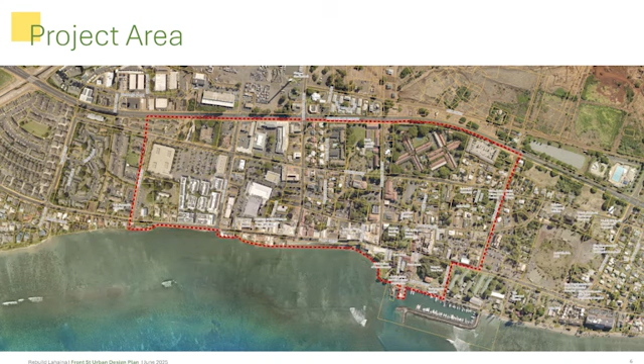This effort we're doing now is in coordination with many of the other rebuild and restoration efforts happening at the same time. There's a concurrent process looking at the Royal Complex. It's actually very exciting, and this process kicked off this week. Next Wednesday, the Department of ʻŌiwi Cultural Resources will have an opportunity to introduce this project. This is an exciting opportunity to restore many of the cultural components of the Royal Complex. You can see the two project areas overlap and intersect at the wharf, so we're going to be coordinating with the group looking at the Royal Complex over the coming months.

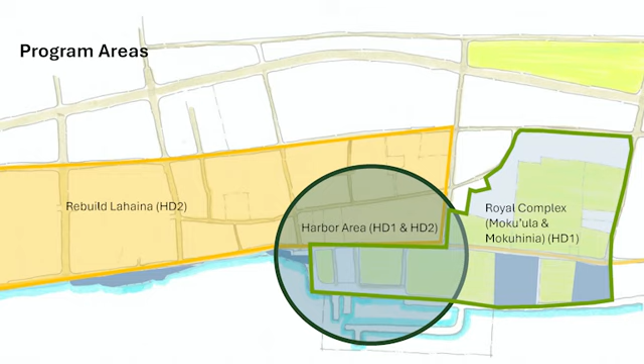We're at the beginning of our process. We actually started with an initial trip last month, and we're here at the June Community Workshop. We're going to go through a process of testing, getting feedback from you all, and refining our concepts between now and an additional workshop that will come back in September. The goal is to get a phase 1 plan together very quickly by the end of the year. We're trying to go quickly because we know a lot of people in the commercial core want to rebuild, and one important thing they'll need is design guidance from the county on what they should be expected to do. That's an important part of our work here today.

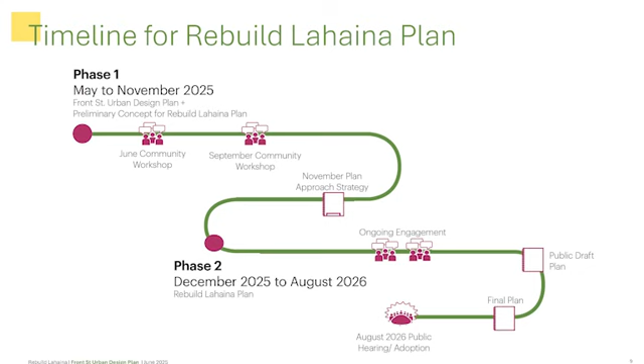There's a phase 2 piece that will happen mostly next year. It's going to look at a larger portion of the Rebuild Lahaina Plan area, the area that was impacted by the fire. So we're doing an initial focus on the commercial core, and we will spread our boundaries out and look at those for phase 2 starting in December.

We're here just to start testing ideas and design options as we learn, but the goal is by the end of the summer, when we come back in the fall, we'll start to work towards preferred design alternatives that can become components of the plan. The idea is this is a more concentrated, focused effort looking at a smaller area of the West Maui Community Plan, giving us an opportunity to dive deeper.

One of the things we can do here is provide some design guidance, because the documents we have don't give a lot of good content that provides guidance for setting expectations for what can happen. We understand we're in a context where folks can rebuild - they have the opportunity to build back what was there before. But we also know folks can make choices about making changes, and that there were portions of Lahaina that maybe weren't working as well as they could. We've had an opportunity to hear what some of those things are from all of you this week.

So the planning process: we start with ideas and visioning, put those out to you, get feedback from what we heard, and try to make refinements. We're here at the beginning. The idea is we'll work towards some things where we actually find agreement, and where we find agreement and consensus, we'll put those things together into a plan.

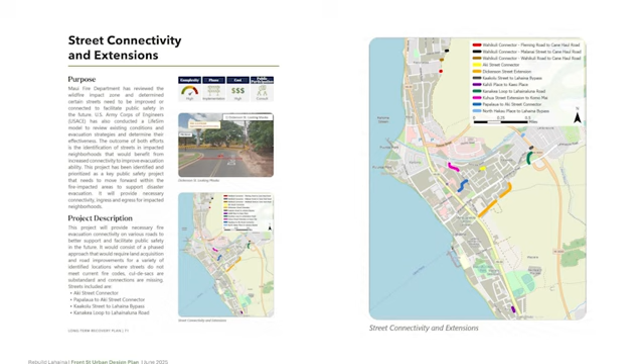We also are concerned about connectivity. This is a page from some of the plans that were produced in response to the disaster in Lahaina. The idea of connectivity, not just to make a walkable place, but to make a safer place—the folks up at Kahua Camp who were stranded, and the other challenges people had getting out, were due principally to the lack of connectivity in the street network. That deals with fire, but it also deals with issues like tsunami evacuation and any other time you want to get out of the neighborhood quickly. So this idea of reconnecting the snipped streets, and having as porous and flexible a network as possible, isn't just best for walkability, it's best for safety.

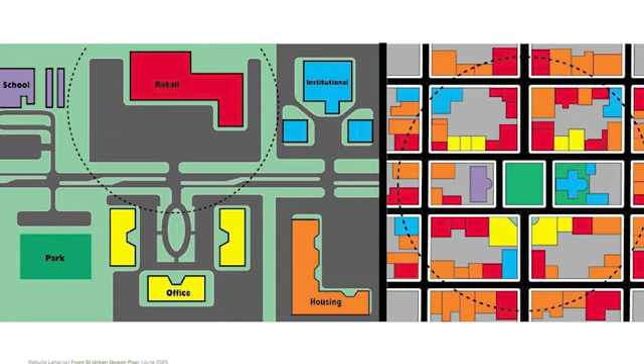I would add, there's actually—if you can see my laser—21 ways to get from this lower corner to this upper corner. So the network really provides that sort of flexibility that's safer as well.

The other issue that came up in terms of connectivity—certainly pedestrian connectivity—was the idea of pedestrianizing Front Street. We're going to be talking about a whole range of options for what that might mean.

As an advocate for walkable cities and walkable towns, I'm a huge fan of pedestrian streets. It's a bit of a challenge because about 210 retail streets in the US were pedestrianized in the 60s through the 80s, and about 190 of them failed—the merchants went out of business. So we're very wary of what it means to pedestrianize the street. The main lesson isn't to not do it, but to do it in a way that's flexible—to do it in a way that if you're not successful, you can open it up again.

To do it in a way with bollards that allow you to have it open certain times and closed other times. One thing we don't know yet - we're going to present a first concept tonight for how much of Front Street might be a more strictly pedestrian zone, but that's something we want to hear back from you about. We've certainly been hearing a lot from different folks who visit about their goals.

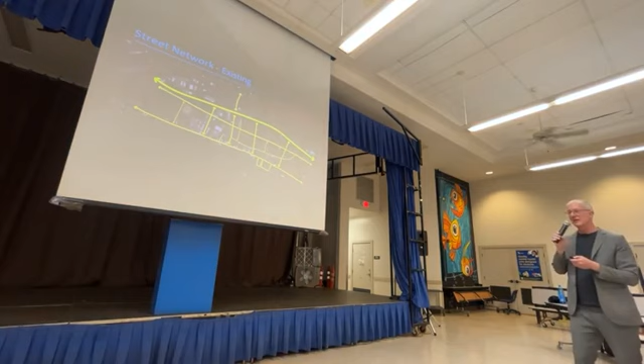I'm going to hand it now over to my colleague Ben Parker, who's going to talk to you a little bit about the street network.

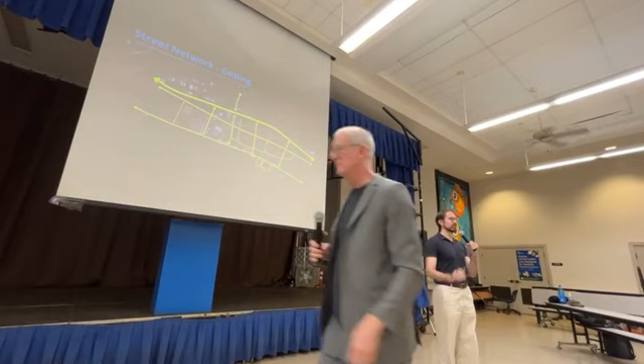Thank you, Jeff. And thank you all for coming out tonight and sharing your time and your thoughts and your place with us.

So this is a diagram of the existing street network in the Lahaina commercial core, with the Honoapi'ilani Highway in the back with 2 lanes going each way, Wainee Street running the length of the site, Luakini Street running for part of the way through the site and then currently stopping, and then Front Street running along the waterfront.

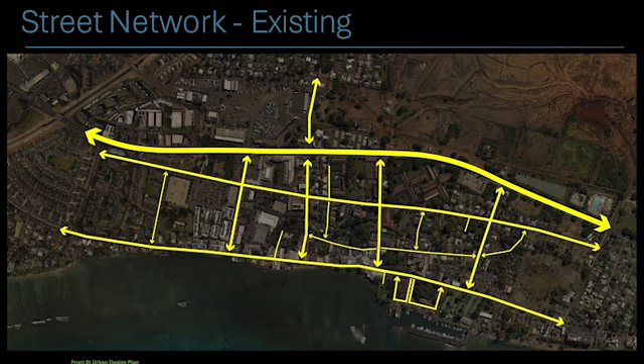Four main Mauka-Makai connections currently, with a few other partial connections. And as Jeff was saying, a street network with small blocks is really important for walkability. It also helps with traffic and also helps with safety.

One of the things we've been exploring this week is extending Luakini Street all the way through to Baker. We think this would extend the character and activity of the core of Lahaina town, as well as help with the overall street network issues.

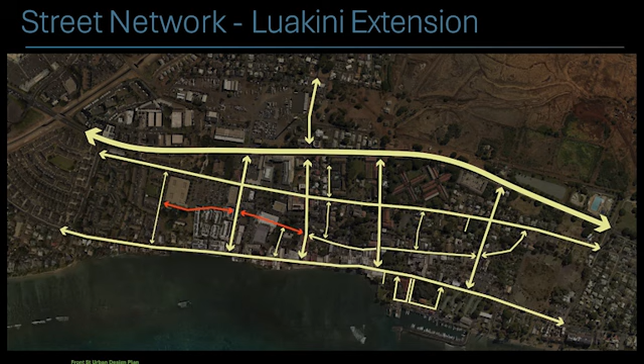We've been in conversations with community members who are stakeholders in these parcels and around, and they're open to and excited about this idea. Another important idea we are experimenting with is connecting as often as we can back to Honoapi'ilani Highway.

We understand that because of the Lahaina bypass, this road eventually - not now and maybe not even soon - but eventually may be returned to a county road instead of being a state road.

And this gives us a lot of opportunity in what we do with the road, especially if you're crossing from Mauka side down to Lahaina, and you're a pedestrian - maybe you park your car here or you walk down - or if you're a cyclist or anyone who's not in a car, crossing Honoapi'ilani Highway is very uncomfortable currently.

And if we could make that pedestrian crossing more safe, more comfortable, it would do a lot to connect the commercial core to the rest of Lahaina.

There are other opportunities where we think it makes sense to put cut-throughs. Obviously that's a complicated thing that involves a lot of conversation, a lot of process, and a lot of learning. And not every one that we show would necessarily make it.

But from the perspective that we know small blocks make great walkable places, we think it's worth exploring where you could possibly connect some of the street network, because some of these blocks are very long, and while there's good connectivity along the water, there's not as good connectivity back Mauka side.

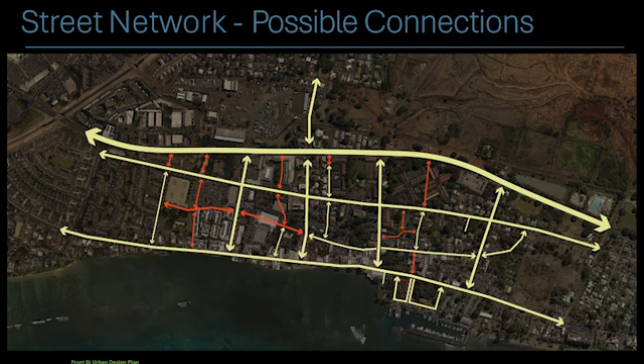There's also existing pedestrian connections that existed. So on Front Street, if you parked in the back off of Luakini, there were these small pathways that you could walk and get out onto Front Street quickly. We think those are very important.

And we think exploring opportunities where new pedestrian connections could be added is also extremely important and worthwhile when we have the opportunity to do so. So that's how we took what we've heard about the street network and what we've learned over the years and applied it to our initial studies.

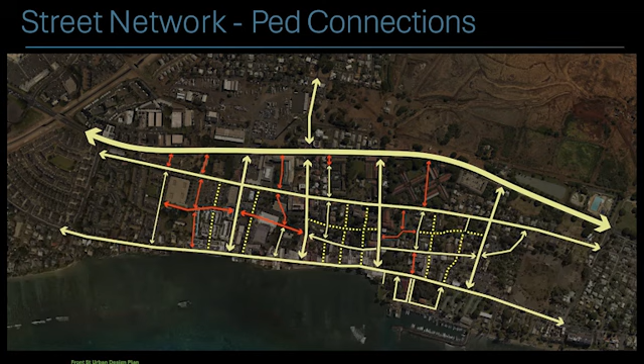Jeff is going to talk about one version, one possible version of what things could look like. I completed this little series of drawings right before we came over here tonight, but I wanted to show you in a different way how this network could be stitched back together.

So what you see here is the existing network, and Ben mentioned most of the streets, but just to orient yourself - the Foodland block is this very large block here, which we're proposing that Luakini cut through, as with the next block, which is the outlets of Maui.

Again, both of these - the owners of these sites are prepared to develop them fairly quickly, we believe. So you can see the opportunity to bring Luakini through, as Ben mentioned. But there's lots of other opportunities.

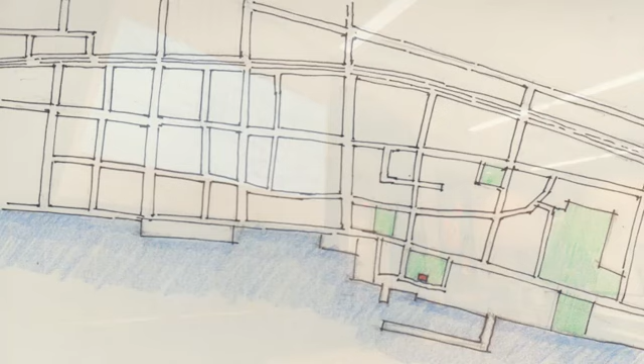And so the difference between these two slides - you can see that, for example, the Foodland block and the outlets block, essentially this quarter of this block is still a pretty big block when it comes to the sizes of blocks that you find in towns.

It makes sense to break it up in the way that you see. You see those blocks to the north, to the left, being broken up. You see additional Mauka-Makai connections coming through those blocks, extending all the way to the Honoapi'ilani Highway. You also see additional streets that dead end, that almost reach the highway but don't get there yet.

You see this street here being extended through. As Ben said, these connections to the highway will be a long time coming, but we think it's important to put them in the plan so that as the plan evolves, and when the highway becomes available as a county road, the network can be completed. Essentially, that's the first thing you see happening.

The second thing you see happening is the idea that up at the mill site, across the highway, is at least tentatively planned as an ideal location for a transit center, for a multimodal hub. It's also a great place to get the tourists to park so they don't bother you with their cars in the heart of the city.

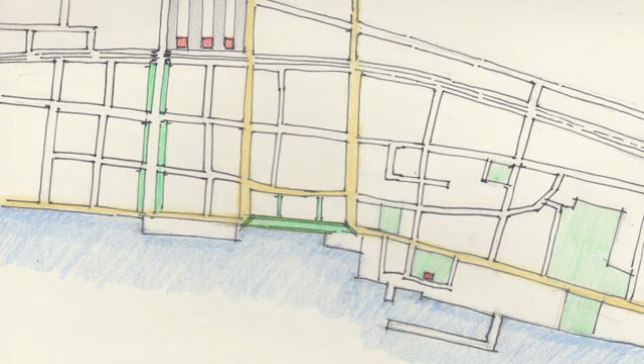So that's that. Next, what we're showing is the idea of pedestrianizing at least part of Front Street. What you have here is Lahaina Luna, next to this proposed transit center. Lahaina Luna is a very important access point into the neighborhood. Next over is Dickinson, another good access into the neighborhood.

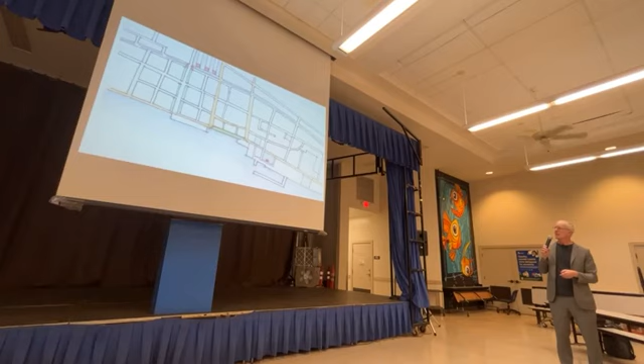Now, if you look down at the shoreline, you see that there's extended shore here where shops once were. There's also extended shore here as you get towards the wharf. But the place where Front Street is skinniest and tightest, with the least opportunity for using it well, is between those 2 streets.

So it really makes sense, as you see in yellow, to have kind of a loop where you come to the water and go. This is all two-way streets, but basically a loop to the water north on Lahaina Luna, and a loop to the water south on Dickinson. And then the idea is that in between—and our landscape architects are going to show you more detail of this—the street in between could be a pedestrian street.

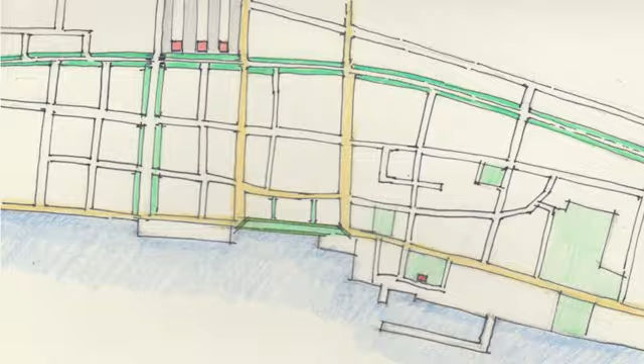Finally, in this drawing, you see the green surrounding the highway. This is, again, part of the dream about what this could be. But rather than having Lahaina split in half by a highway that has now effectively been replaced by a bypass, does it really need to be 5 lanes anymore? The car counts on it would suggest it does not need to be 5 lanes.

And in fact, it currently is not 5 lanes, because if you've driven on it today, it's actually just 1 lane in this direction, and it's functioning. So the idea there is that it could become a really special street. You have a lot of trees here that grow very quickly.

And I understand in this part of the island they might require a little more water and a little more attention. But from someone who's not from here, the street trees that you have are just mind-blowing. The idea that street trees can be placed between, not forcing you into the road, but between the sidewalk and the highway, creating a protection from the road, is something that excites us very much.

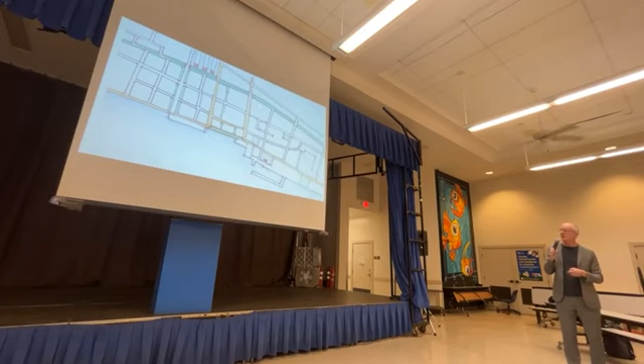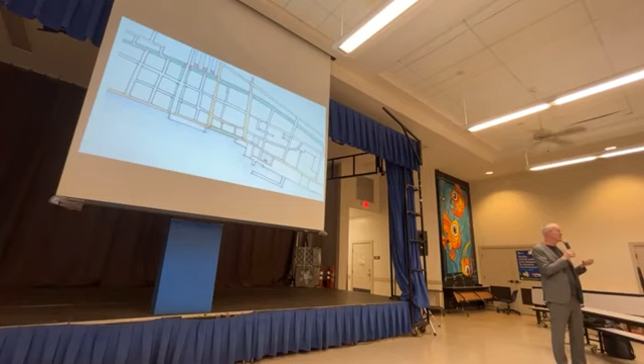So that's kind of the last move that we're recommending, and this then is our preliminary proposal. What I haven't talked about is changing the individual streets within the plan, and we don't want to see the character of Lahaina change. We don't want to see those streets become widened, or start to look like all the other streets in the rest of the island or the rest of America. However, every street that we visited presented some opportunity to make it a little more pedestrian friendly, a little more green, a little more walkable.

So very quickly, Julia Lockman from my team is going to walk us through some of the proposals that we're making for these streets and the strategies that we're using to make them more walkable. Thank you, John. Hi, everyone. I'm Julia.

Really honored to be here. And these are some representative street sections of the strategies that we're trying to work with so that we can make Lahaina town more walkable and more enjoyable to be as a pedestrian, biker, or a driver.

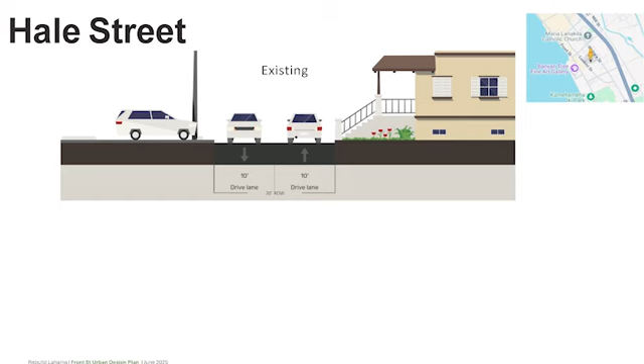So here's Hale Street. The existing right-of-way is 20 feet. And we put out here narrowing the driving lanes and adding an advisory lane so that cars can pass one another and dip into that advisory lane that is a shared space for pedestrians and bikers that is clearly delineated as a space that people can use in a shared way.

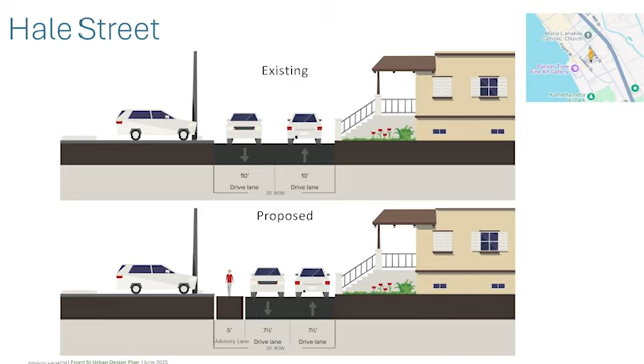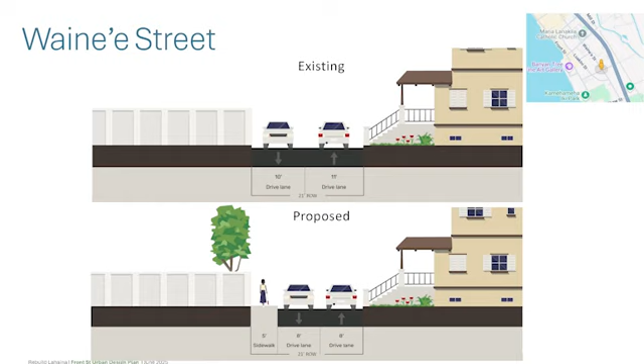Another strategy we use is taking driving lanes that are a little bit too wide and adding in a sidewalk so that people can walk alongside, narrowing the driving lanes within the existing right-of-way that already is there. Then also encouraging residents and businesses to add to the street canopy where there isn't space for street trees on the right-of-way owned by the county to make the walk more comfortable and interesting for pedestrians.

Then we have Papalaua Street, which represents a lot of the strategies that we're trying to work. As Jeff said, this is one of the widest streets in the center of Lahaina town. And so we wanted to narrow down these lanes, take out the turn lane because it's not necessary for the amount of traffic that is currently and projected to be on that road.

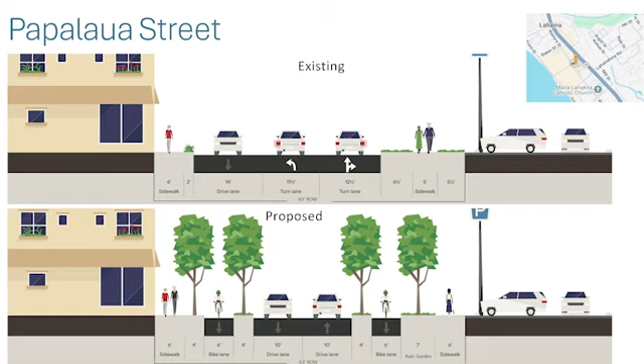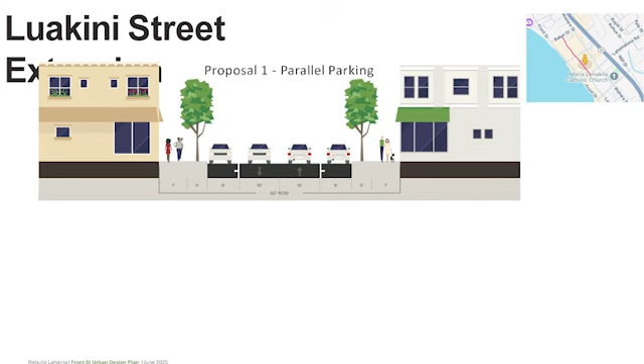And then the Luakini Street extension, we picked out two possible ways to orient this as we were talking with the businesses. On both sides, we want to have businesses facing the street so that people feel interested and safe on these streets. We have parallel parking as one option, and then we have angled parking as another option, which would have more street trees in between the different cars for parking options.

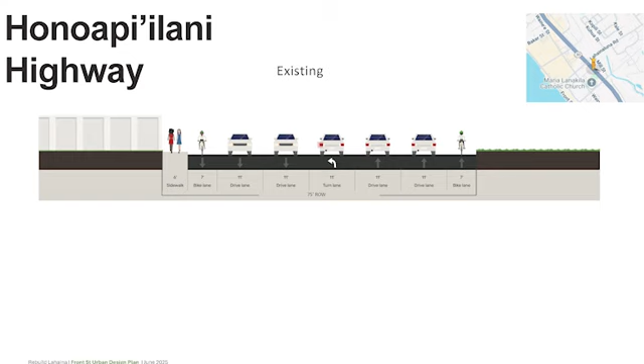And then options for the highway, for in the deep future, to make it more interesting and walkable and crossable for people to come into Lahaina town is to narrow it down from 5 lanes to 3 with a turn lane, adding in a parking lane, bringing pedestrians onto both sides, and then adding substantial street trees so that it's a more comfortable place to walk.

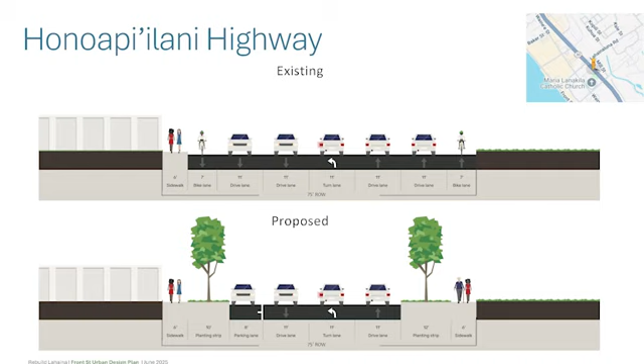So those are some of the preliminary strategies that we're proposing today, and we'd love to hear it. Thank you, Julia.

That sums up our preliminary, and I stress preliminary, thinking about both how the network would function and how the streets and roads within that network would function. A huge part of that is landscape, trees, and greenery. And I think it's time we bring up our landscape team. This is Marcel from Bionic, who will tell you more about that.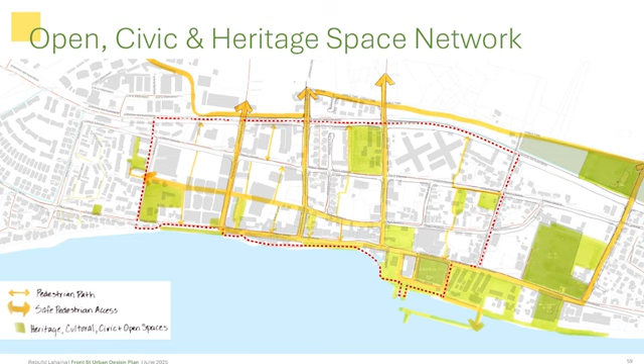In the network of all of the streets, there's a whole series of connected places. These are your cultural sites, your public open spaces, and your streets. And when you combine them all together, you get an open space network. One of the comments we'll see back here is more public open space, more places to gather, and amenities. Well, it's crowded. Lahaina Town is crowded, and there's not a lot of available space.

One of the concepts that you can sort of squint your eyes and start to see is that we're making use of the small, the medium, and the large to make sure public open space is distributed all the way across Lahaina Town, not just in one place or another.

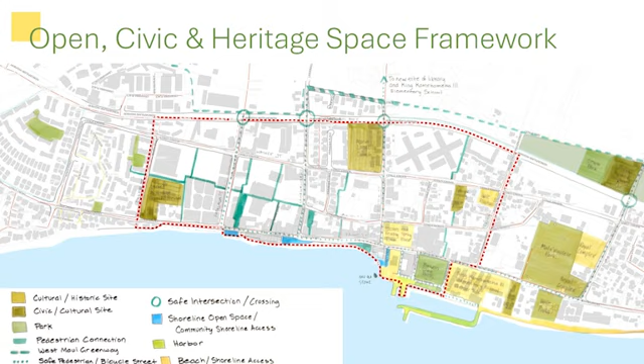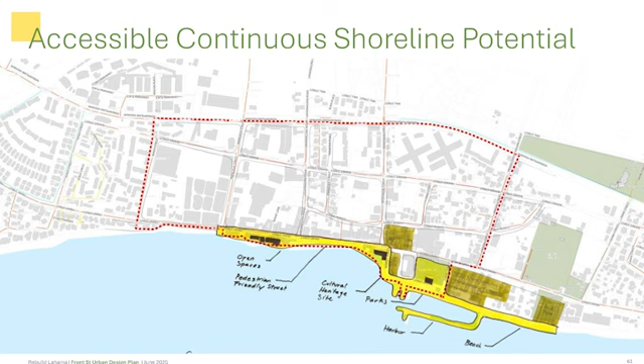If you do that and you're strategic about it, there's the possibility of connecting these sites up, so the sum of the parts is in the whole is greater than the sum of the parts. One of the things we have heard calls for on many of the Post-its is connectedness. If you connect the cultural sites and use streets and plazas and public spaces, you can get a continuous kind of space at the water's edge, which is something that's very human, and we're all drawn to finding and reaching the water's edge.

Another comment that you'll see a lot of is about Front Street. Closing Front Street, pedestrianizing Front Street, no cars on Front Street. And so we've really tried to put some shape around what that could possibly mean. Here's one set of opinions, which is that Front Street should have cars all up and down. And that's the way it was pre-fire.

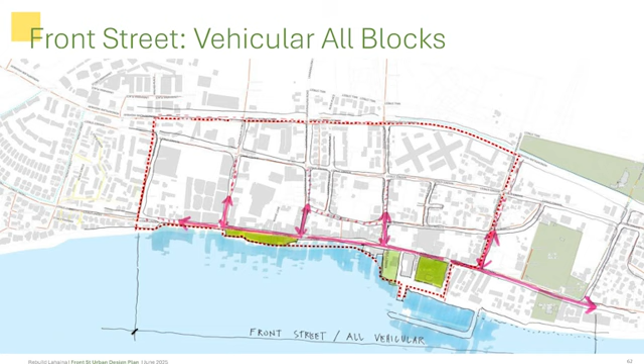And so these red arrows indicate where cars could go. There's a different version which says that we're very confident about this piece in the middle, from Lahainaluna to Dickinson, that might be a great place to have pedestrianized. And then cars could circulate around that on both sides. So that's another way to think about it.

And then there's another thought about pedestrianizing Front Street that says maybe from Lahainaluna North, that part's vehicular. Lahainaluna South, maybe up to the Royal Complex, that part's pedestrian. And then maybe when it gets into the Royal Complex, it goes away entirely. And that space really becomes something different. It represents a shift in the way you think about it, the way you interact with it, commands a different kind of respect.

There's a whole team that's going to be studying that. But that's a different version of what a pedestrianized front street would mean.

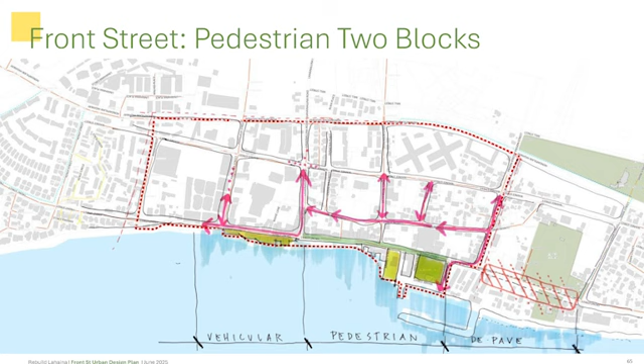I think floating above this at 30,000 feet is a little bit abstract. It's kind of hard to put your head into it. So we zoomed in to the one part that we're really confident in, that pedestrian, a greater kind of pedestrian priority is probably a good idea.

So when we talk about pedestrianizing Front Street, we're talking about maybe it could be something like this. It feels more like a park or a plaza where pedestrians have the priority, where the materials are nicer and richer, where there aren't curbs, and you can walk freely Mauka to Makai without barriers. So imagine a pedestrianized Front Street that you might be talking about something like this.

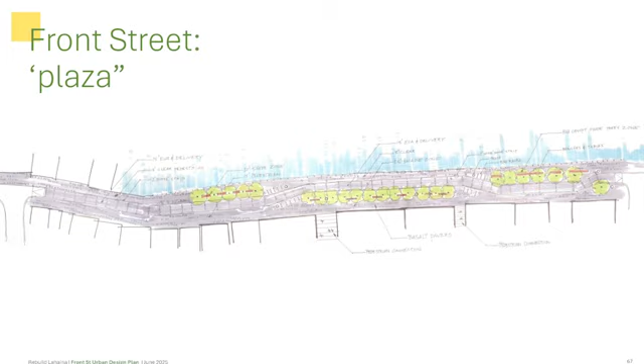And so this is very washed out, I'm realizing. But here's two different ways you can think about it. So this is Front Street as a plaza. And what it contemplates, I'm just going to point some dimensions out. Here we're at Dickinson, Lahainaluna here. This section to about the curve in the road is 40 feet. And then when you make that curve and you go from the building face to the seawall, then you go out to 50 feet.

So you have more room. What can you do with that extra space? This drawing shows one lane going down the middle, one way going south. It shifts to one side, then the other, which slows cars down.

When you do that, you create bigger spaces for trees, shade, and public gathering, and give businesses room to breathe, maybe dining out on the sidewalk. There are a lot of possibilities when you use that street not as a street, but as public open space. This is Front Street as a plaza.

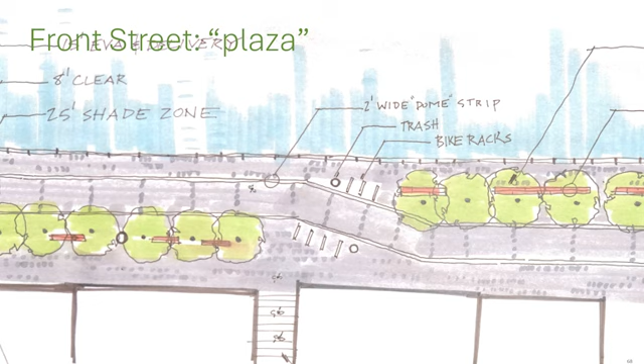Here we're zoomed in. You can see places for bike racks, places for benches, a wide 8-foot area to pass at all times, and this shape of the road keeps things nice and slow. Pave it with a beautiful local stone, black basalt, and that would really change the mood of Front Street. That's one way to think about it.

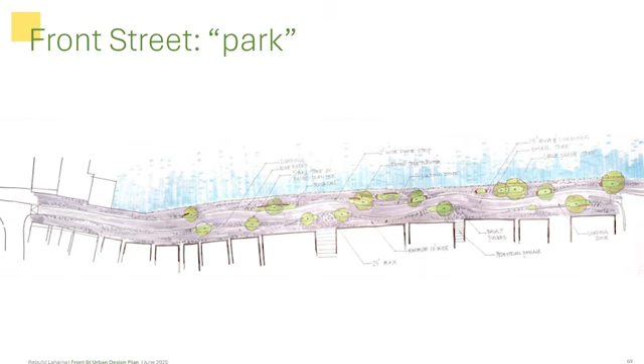Another way to think about it is Front Street more as a park, more free-flowing, not so linear like a street, but wandering and casual. It changes the shape of the street to a flowing curve, with wide spots and narrow spots, and room for planting and trees.

Here we're zoomed in. Imagine a Front Street that never gets narrower than 10 feet, almost double what's out there pre-fire, or places where it swells to 25 feet wide, with trees and the right bench in the right place looking out to the view, nice and slow. These are a range of ideas about what's possible when you think about Front Street as public open space, not just as a road.

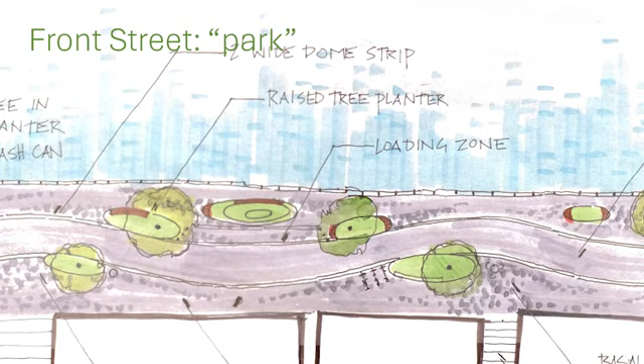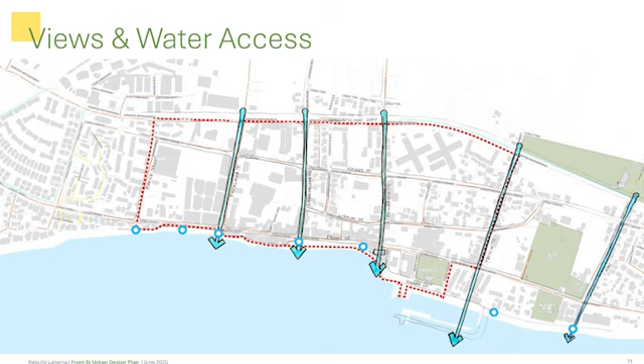Another set of comments was about views, how important they are, and access to the water. So this is a simple idea: don't build things in front of the street ends, and at every street end have a way to access the water. You can talk about that as creating equitable access to the water all the way across Lahaina town. You don't have to go all the way across town to get into the water if you're over here.

But how would you do that? Here's an idea where access to the water at the end of the street is just a little stairway that allows you to get down there. That's not something all abilities could do, but a lot more people could get to the water that way.

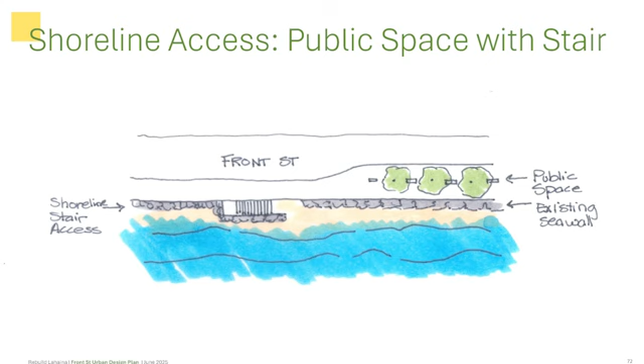Here's a version that says if we want to get everybody to the water, maybe we have a little stairway and a ramp. But it takes more space, and you have to interact with the water's edge, which is more complicated to do.

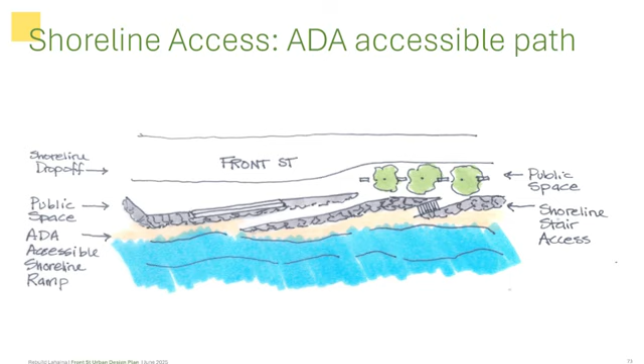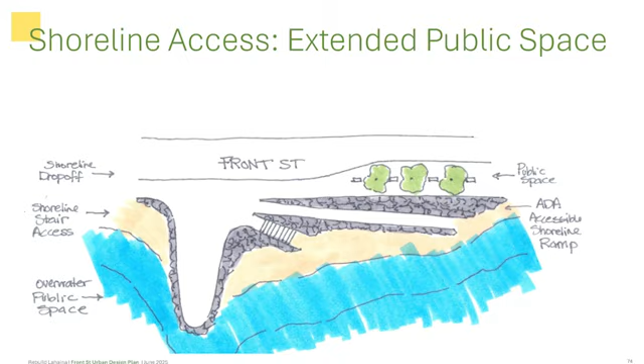Or finally, maybe there are places where you push out a little more, with a stairway and a ramp down. For people who can't do that but still want that water experience, maybe there's a place where you can go out, leave the town behind, and maybe cast a fishing pole from that spot. Different ways of creating water access could mean something quite complicated or something very simple.

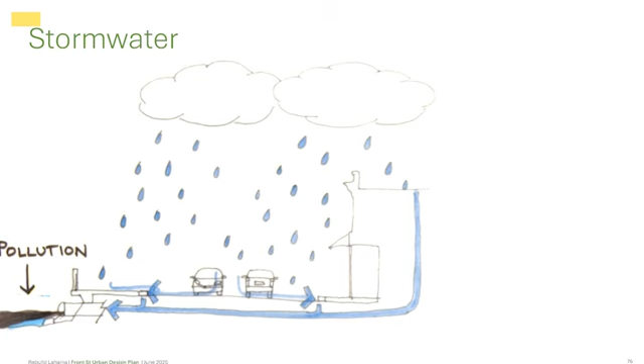Another set of comments is about the water itself and the ecology of the reef today, and how rebuilding can make that better. Today, water that hits the streets and buildings goes into pipes, picks up pollutants, sand, maybe oil, and goes right into the reef, which is bad for it. Building back better would mean intercepting that water, treating it, not letting it all go in as fast as possible, and delivering better quality water to the reef. That's a good start, beginning with treating stormwater in the streets, where the water lands.

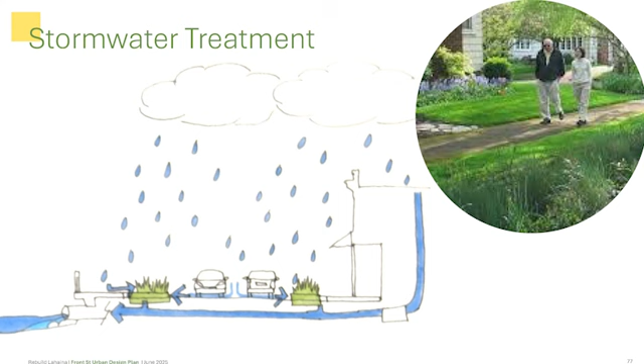Other things that could contribute to the health of the reef: stormwater management inland, making the seawall ecologically productive, creating niches for microscopic organisms, smaller organisms, shellfish, juvenile fish - that's the nursery to the larger reef. And then possibly even re-nourishing and reseeding the reef. It's a different kind of ethic about how building back could think about the reef and the water, and you can imagine this scales up to the entire district.

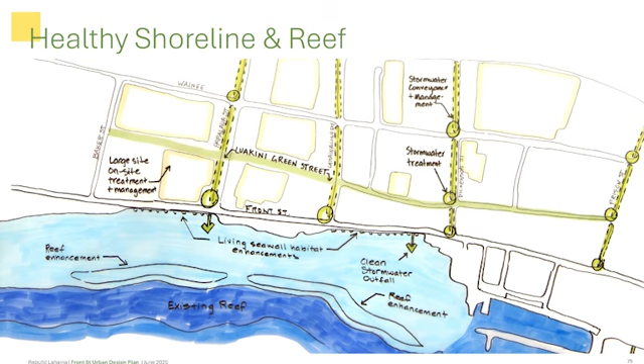You scale the entire district and you have to think about it this way - what can you do when water lands here, on its way to the reef, the kind of water you release, the habitats we can create here, and being good stewards of the reef in the future. So that's a summary of things we heard and ideas we put on paper.

Sometimes there's a lot of agreement, sometimes there's a lot of different opinions. The point of this process is to keep creating those options and bringing them back to you and getting your feedback. With that, the next part is about rebuilding, and I'm going to pass this back to Stefan.

Hello again. How's everybody doing? Good? Okay.

We've been here for a while. I'm going to try to close this out so that we have some more time to talk story after this. And I believe we also have an opportunity to hear from our mayor.

So I talked about this idea of design guidelines, providing some guidance so that property owners have an understanding of what the expectations are for when they rebuild. I'm just going to focus on 3 things that resonate with some of the themes you heard tonight. The first one is making streets and blocks, particularly where blocks might be really big.

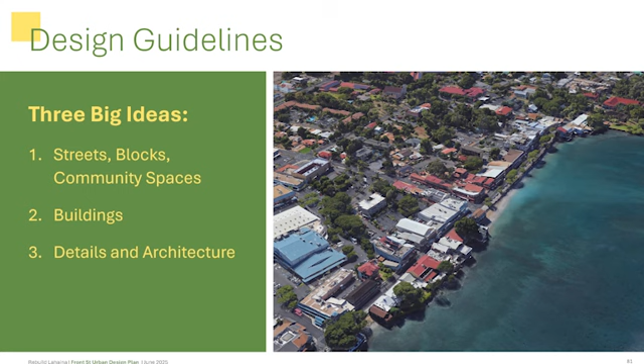The second one is thinking a little bit about buildings and what makes buildings in Lahaina Town special. And then the last one is about the details, the different things of architecture that made Lahaina Town so special. These are all things we have an opportunity to think about and present in a straightforward and objective way so that folks rebuilding have some clarity about what the expectations are.

Jeff talked about this idea of making blocks out of the Foodland and Outlets of Maui blocks. And this is just to show some ideas for what can emerge from that.

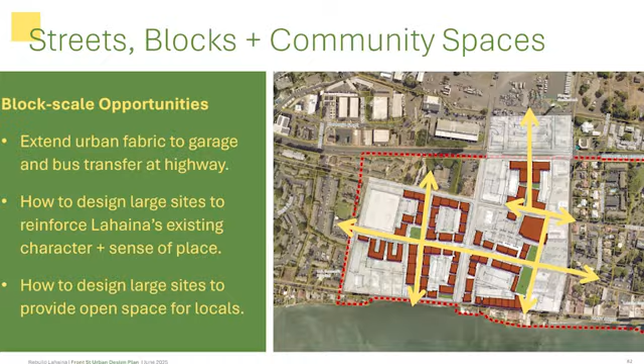So we want to understand if we have opportunities to reinforce that. This shows how buildings and open spaces - and we can think a little bit more carefully about how we arrange parking lots in that context.

I do want to mention that one of the things we heard was that there was a need for community space in Lahaina Town - that if you wanted to have a family get-together, rent a banquet hall, have a party, there was really no space available in the core of the community anywhere. The cinema space at Foodland had provided that opportunity, and what we understand is that part of the building in particular cannot be rebuilt.

So we thought, what if there was a community space in this part of town that was both proximate to Front Street, but could also bring back some of those family-oriented activities. One of the special pieces of this is that the Luakini extension here, we thought, would be a really great opportunity for a community open space on the inside of the block, adjacent to where Foodland is today, that could be organized with maybe a banquet hall or a community space, both indoor and outdoor, used for those kinds of opportunities. And then you could get right out to Front Street. This is, I think, the sort of Wahie Lane here that some of you might remember.

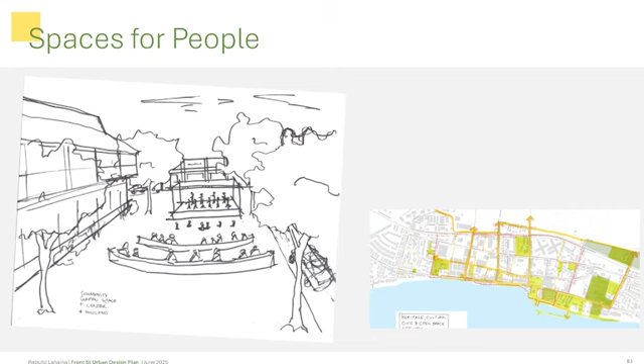So that's one thing we can think about. We can provide guidance to property owners about what we want to see on some of these parcels.

I'm going to talk a little about building form. Really special and unique, different from a lot of spaces that we know. Parcels were really tiny, buildings were actually really small. You could walk through town and pass an awful lot in a short period of time, and things were built close together. So we want to understand what guidance we can provide so that Lahaina town looks and feels a similar way, even though we know we're not going to build it back the same. The walls are going to be different. We need to use things that are fire resistant, but we still have an opportunity to build compactly.

This is a place where there isn't a lot of guidance in the planning documents that the county has, because there was never an expectation that there was going to be a lot of new building happening. It was all about making adjustments to the historic fabric that was still there. So we have an opportunity to think about how we can be really objective and provide guidance for what we expect property owners to do.

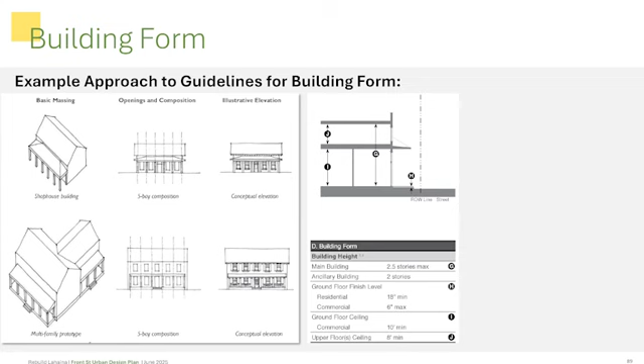Two things in mind here: the massing of buildings, but also how buildings orient to the street. We use the word frontage to describe what the face of the building is like and how it might relate to the sidewalk or the front yard in front of it, and we can provide some clear guidance for that.

So we have an opportunity to say, well, what should the architecture be like in the future? What are the details? If there's an overhang, how should we do it? We can provide clear guidance so that property owners who might be rebuilding have a sense of what the expectations are.

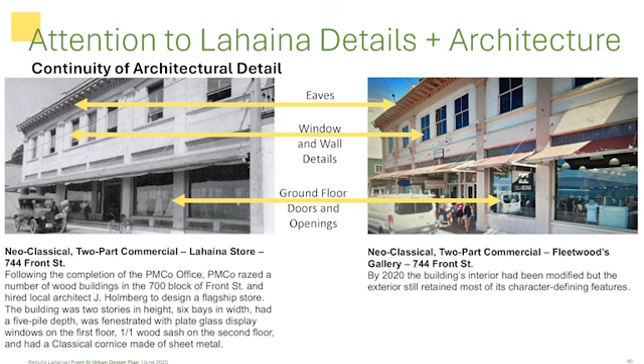This is another example where you can see the historic version on the left. Many years later, a lot of those historic pieces are no longer there, and a lot of things have changed. So it raises this question: if we build it back, do we build it back just like this, or do we have an opportunity to think about some of those historic elements that were nicer, that we could work with the property owner to bring back and potentially recreate?

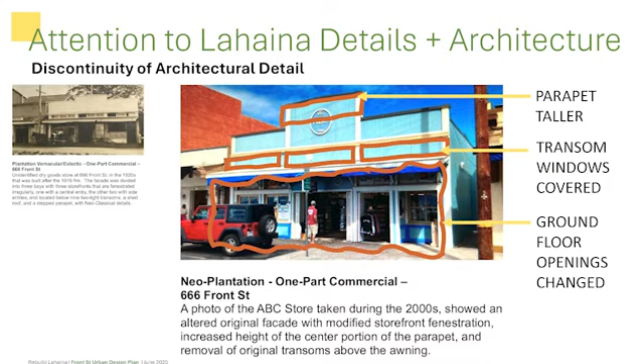And here's some examples of how we can do that. With clear guidance, we can provide some drawings that show and set expectations for what folks are supposed to do, and we can be clear and quantifiable to the maximum extent that we can.

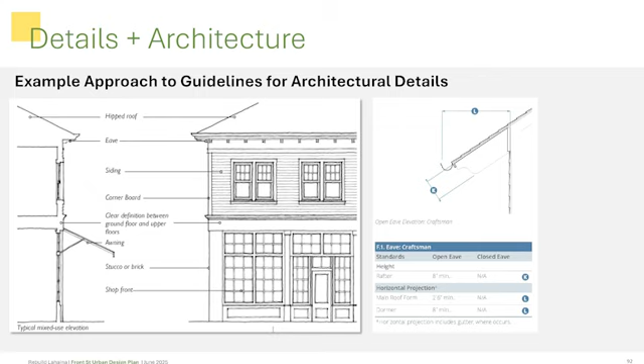There's going to be some online engagement occurring over the summer. Then our team will be back sometime probably after Labor Day to have a second phase of workshops where we can share additional information with all of you in more detail and start to think about what's going to end up in the plan. We're hoping to have phase 1 of this done by the end of this year. We know that a lot of folks are ready to rebuild, and we want to make sure we can work in a time frame that works for everybody.